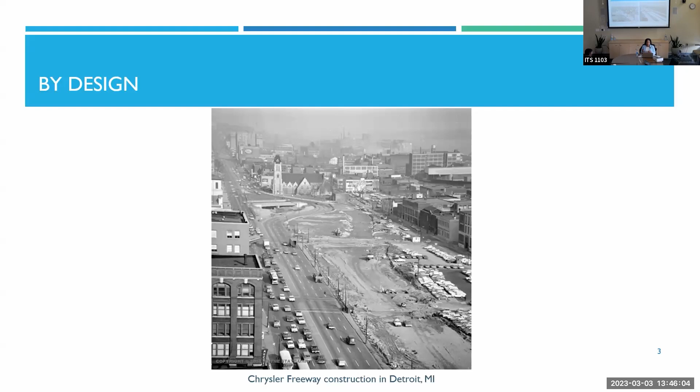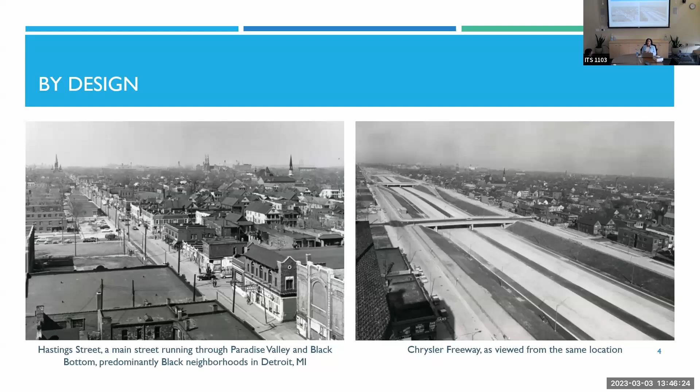Here we can see an example of that destruction. You can see in both images the extent of destruction. Hastings Street, which you see on the left, had over 300 businesses, all of which were destroyed for this freeway. These are images of Detroit from the same place.

These are images of Minneapolis, provided by Segregation by Design. I'm not sure if anyone here is following that account, but it's a great Instagram account because they're going city by city to really look at the impacts of freeways. These images show that this happened all across the nation.

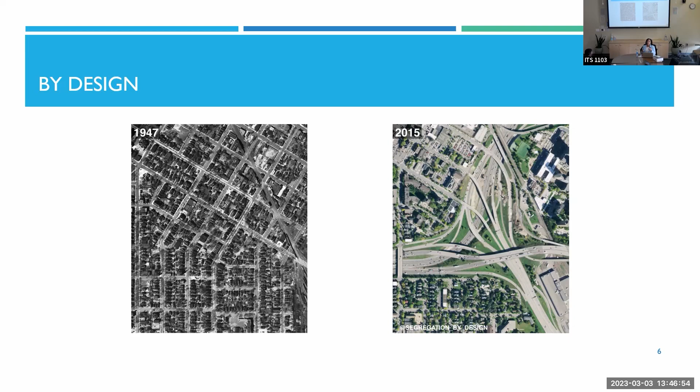So what are the consequences of freeway investments? Freeway investments, along with discriminatory housing and lending policies, include an automobile-dominated transportation system, restricted mobility, stolen wealth and concentrated poverty, a heightened risk of pedestrian injuries, and increased air and noise pollution. Freeway placement really promoted segregation, physically isolating communities of color in polluted environments.

Then add discriminatory planning practices such as redlining, racially restrictive covenants, and exclusionary zoning, which prevented movement to other areas. Due to these practices, Black folks are more likely to live near major roadways. In fact, almost a quarter of African Americans in the US live near highly trafficked roads.

The study found that when looking at low-income people of color compared to high-income non-Hispanic whites, there is a disparity of 28%, where low-income people of color are exposed to 28% higher NO2.

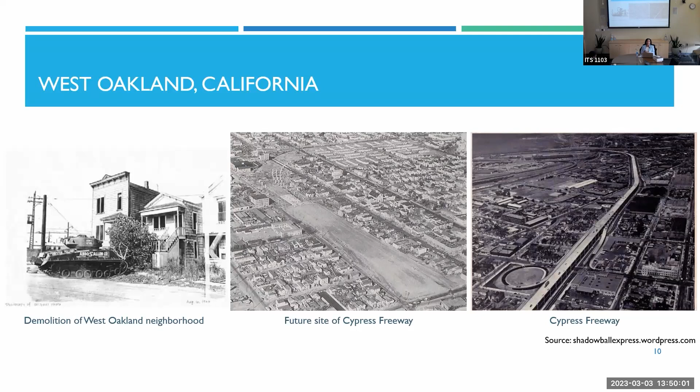Is anyone here from the Bay? Folks from the Bay will know West Oakland is surrounded by two additional freeways, as well as other urban renewal projects, including the big post office distribution center you may be familiar with. Together that destroyed 5,000 housing units and resulted in economic decline in the area.

When the Cypress Freeway collapsed during the 1989 Loma Prieta earthquake, the California Department of Transportation favored a rebuild option on the same alignment. However, unlike during urban renewal, there was now the National Environmental Policy Act, which provided the community with the opportunity to participate in the decision-making process.

For Caltrans, it was simply about replacing this critical freeway infrastructure link. But for the community, this was actually an opportunity to redress environmental injustice. We see what freeways mean to different entities, to different stakeholders.

Community leaders and activists organized the Citizens Emergency Relief Team, or CERT, to oppose reconstruction along the original route. Among its members were Bill Love, whose mother actually led the fight against urban renewal and saved homes in West Oakland. So to still see those old homes in West Oakland, that took a fight, because those were all going to be gone.

As well as Paul Cobb, whose grandfather's home and grocery store were demolished. Until recently, I'm not sure if folks know how West Oakland was considered a food desert because it didn't have a grocery store. Pre-freeways, there were grocery stores. After freeways, there are no more grocery stores.

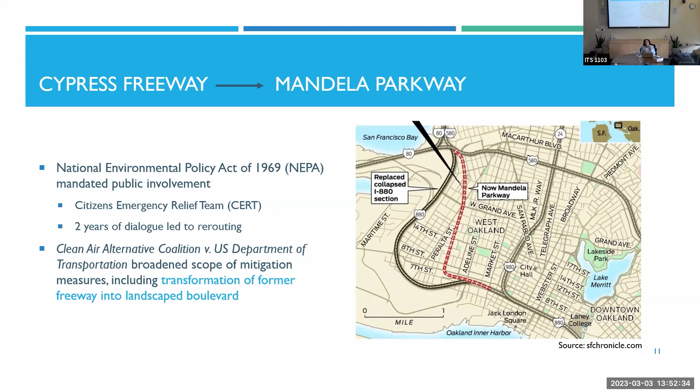Freeway removal or rerouting projects often involve building a street level landscaped boulevard in the former corridor. Transforming the former alignment into a landscape boulevard increases green space, which is great.

However, a consequence of that expanded green space is what Wolch, who is at UC Berkeley, defines as the green space paradox: while creating new green space to address environmental justice problems can make neighborhoods healthier and more aesthetically attractive, it can also increase housing costs and property values, leading to gentrification and displacement of the very residents the green space strategies were designed to benefit.

In this particular study on the Cypress Freeway, I investigated the air pollution and neighborhood impacts of rerouting the Cypress Freeway and constructing a street level boulevard. My objectives were, one, to quantify the local effects of rerouting the Cypress Freeway on air pollution by comparing two routing scenarios, and two, to examine the neighborhood's socioeconomic and demographic impacts as reflected by spatial temporal changes in indicators of gentrification, to assess whether existing residents benefit or are excluded due to environmental gentrification.

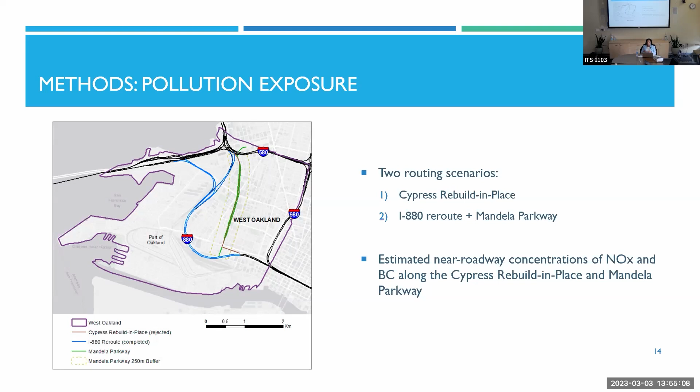So what did I do? The I-880 reroute was completed in 1998 and Mandela Parkway in 2005. I estimated concentrations for the year 2009, due to the availability of traffic count data for Mandela Parkway.

One thing I like about this project, and essential to my work even now, is that this study was only possible because of the use of community data—having detailed traffic count data from Mandela Parkway, from the West Oakland Truck Survey, a community-based participatory research project by the West Oakland Environmental Indicators Project, the Bay Area Air Quality Management District, and Sonoma Technology, Inc.

Is anyone here familiar with the West Oakland Environmental Indicators Project? It's a really great organization fighting for environmental justice, if anyone is interested in learning more about them. But I digress.

From truck counts, I was able to estimate other vehicle types and hourly counts. For the rebuild in place scenario, I combined the West Oakland Truck Survey along Mandela with Caltrans truck estimate data. From the counts, I could estimate emissions using emission factors, and then use a dispersion model to estimate concentrations.

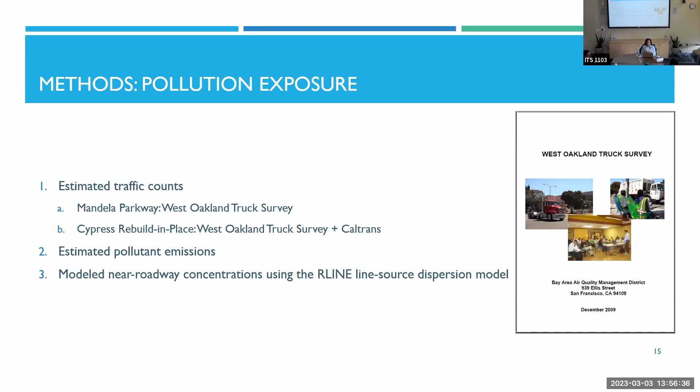Socioeconomic variables: percent college, percent poverty, and then housing variables. So let's get to the results, and I'll briefly go through these.

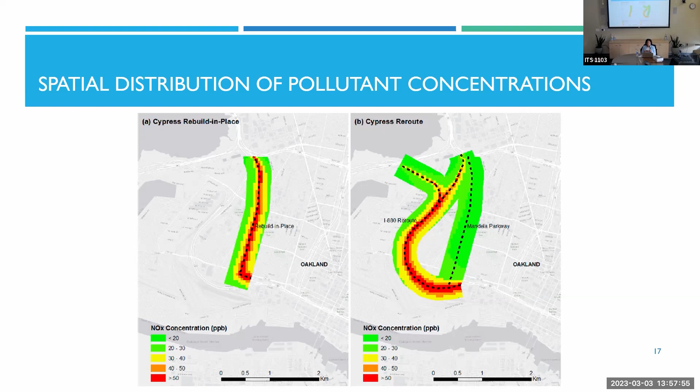This first result is looking at the impact of the Cypress rebuild-in-place and reroute scenarios on NOx concentrations. It provides quantitative data that substantiates that by rerouting the Cypress Freeway, the high concentrations shift from the residential area into the periphery, which is the industrially zoned area. We see a 38% reduction in annual average NOx concentrations, 25% reduction for black carbon. Again, this provides quantitative support to show that replacing a freeway with a boulevard does reduce the traffic burden, which results in air quality benefits.

First, for every indicator, it suggests gentrification occurred. We have decreases in percent non-white, percent residents living in poverty, percent renter-occupied residents. But it also provides evidence of environmental gentrification along Mandela Parkway. We see this with a larger decline in the percent of residents living in poverty and a sharper decrease in the Black population compared to West Oakland as a whole.

Reductions in the Black population may be due to increases in the cost of housing. The median home value increased more along Mandela Parkway. In fact, median home values were lower along the Cypress Freeway than in West Oakland, but significantly higher along the Mandela Parkway as compared to West Oakland as a whole. These larger property value increases along Mandela Parkway may be due to the freeway rerouting and conversion to the boulevard, which is consistent with some previous other studies.

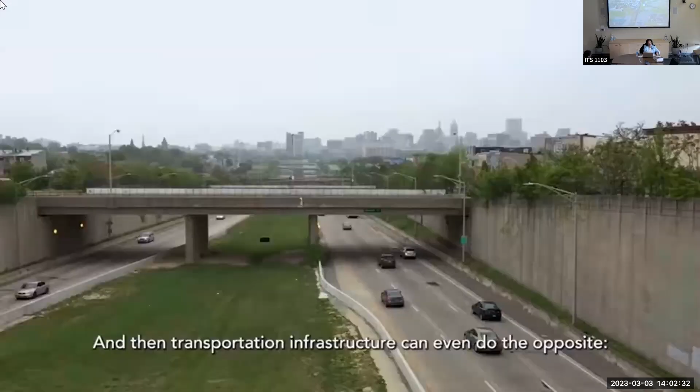Everyone, it's Secretary Pete. We are in Birmingham, Alabama today, celebrating the launch of the Reconnecting Communities program. This is the first ever dedicated federal initiative to repair the harm caused by some of the infrastructure choices of the past, and instead replace them or improve them for projects that bring people together. Good transportation helps people move to where they need to be, travel affordably, quickly, and efficiently, connects you to the places you need to be and the people you love. But sometimes America has gotten things wrong in generations past, and transportation infrastructure can even do the opposite, cutting people off from schools or healthcare, dividing or damaging neighborhoods. But we can do something about that. Thanks to the president's bipartisan infrastructure law, we have funding to make better places that were impacted by the choices of the past.

Sometimes that might mean capping a highway, putting in a park over it where kids can play and people can get across to where they need to be. In other cases, it means introducing a bus rapid transit connection from previously isolated neighborhoods, like what they're doing right here in Birmingham that we're celebrating today. What all these different kinds of projects have in common is that they will better connect people to opportunity, to prosperity, and to each other, which is what transportation is all about.

I'm partial to that video because I have family in Birmingham, so it's nice to see them being recognized. The bipartisan infrastructure law invests $1 billion to reconnect communities, and the Inflation Reduction Act provides an additional $3 billion for neighborhood access and equity grants.

Was anyone familiar with the Reconnecting Communities program? Cool, yeah. I'm excited in a way, but we'll talk about it right now.

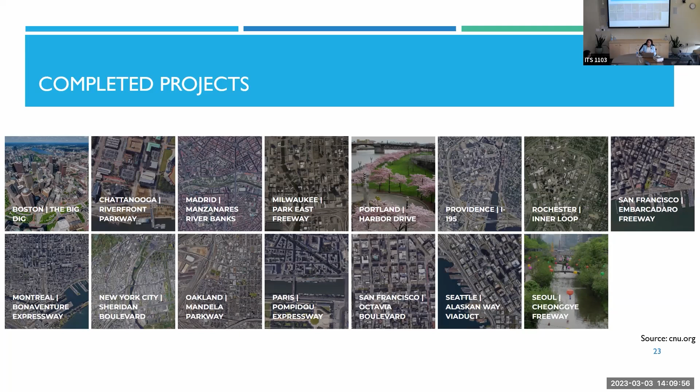Has anyone ever been to the Embarcadero in San Francisco? Did anyone know that it used to look like this? Did y'all talk about this in class? I don't think we used this.

The Embarcadero Freeway provides an example of a freeway that was torn down without a replacement route. I want to highlight this for three reasons: one, to emphasize that this is the goal line for removal—we heard Secretary Pete talk about capping, but the goal really is removal; two, to demonstrate that removal is possible, as we see here; and three, the Embarcadero was also torn down after the 1989 Loma Prieta earthquake.

What had stood there was actually a portion of the originally planned route. It was supposed to connect the Bay Bridge, which we can see in the background, all the way to the Golden Gate. There was supposed to be a double-decker highway that whole way, which really is a testament to the effective freeway revolts of the 1950s and 1960s in San Francisco.

The SF Planning Department had actually planned to build 10 freeways throughout San Francisco, but it was halted, and that's why you got that unfinished freeway that abruptly terminated. After the Loma Prieta earthquake, it was not rebuilt due to continued advocacy. Look at the benefits of a full removal.

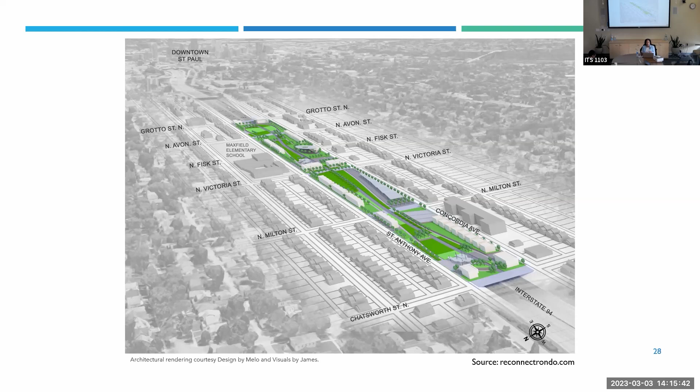And so this is just a rendering of that. And then another example is the I-81 project in Syracuse.

Last January, Governor Hochul announced the $32.8 billion state capital plan, which would include $3 billion over 5 years to reconnect communities across New York State. One of those projects is the construction of the I-81 community grid project in Syracuse.

Construction of the I-81 forced the displacement of nearly 1,300 residents from the 15th Ward, which was a historic Black community that housed 75% of the city's Black population.

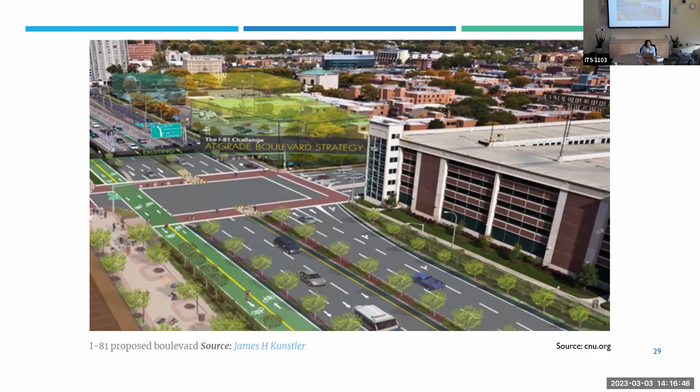The community grid project will remove a 1.2 mile stretch of I-81 and construct a walkable, bikeable grid of surface streets. The city of Syracuse was awarded $500,000 for its Reconnecting, a post-I-81 viaduct planning project. I named this example because one of the groups that was really instrumental in this effort was Hinge Neighborhoods, Inc., which is a member of the Freeway Fighters Network.

And then our final example takes us back to Oakland. The California Department of Transportation was awarded $680,000 for its planning project called Vision 980 Study Phase 2 Feasibility Study, to explore ways to reconnect areas along 980.

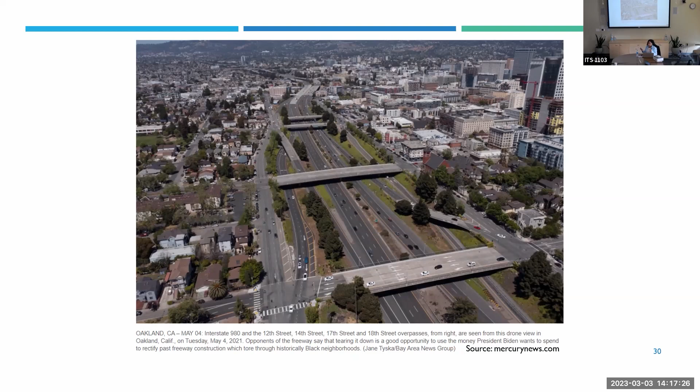I show this to take a moment to emphasize that any effort to repair harm - again, they say that reconnecting communities will really help repair harm - must consider reparations. So the question is, how can Reconnecting Communities restore the lost intergenerational wealth?

I mentioned how many homes and businesses were destroyed in each of these communities. Here we see that 500 homes were destroyed for the I-980. So when we talk about reconnecting communities, it might be good for the land and geographically for folks now to have better connectivity.

But what about the folks who have lost homes? What about the folks who have since moved away completely from Oakland? So how do we repair harm and couple that with reparations for the folks who have lost all of this?

So I just add that before finishing with a few key lessons. One, at this moment, there's an opportunity for transportation investments that repair harm by reconnecting communities divided by freeways. However, as the Cypress Freeway case demonstrates, these efforts must include anti-displacement measures to ensure longtime residents benefit.